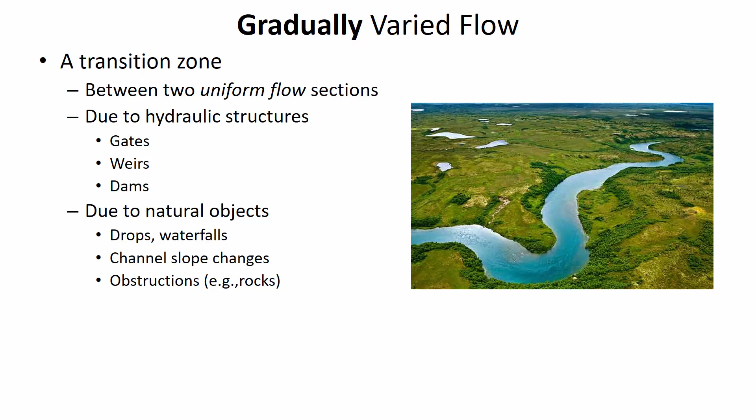There's lots of things that can cause these irregularities, but by gradually varying flow, we mean anything other than a hydraulic jump or water flowing over the edge of a waterfall. Those are the two instances where the depth of flow is varying rapidly. So rapidly varying flow, RVF, is the hydraulic jump, where it's increasing its depth really quickly, or if water is approaching a drop-off, then it decreases really rapidly.

When the depth changes, the velocity does as well, to maintain the continuity relationship. In the calculations we're going to do, we'll assume the hydrostatic pressure distribution as we go down through the depth of the water. Since the water is open to the atmosphere and is moving relatively slowly in open channels, that's an okay assumption for us to make. It's not so bad. And we are going to be accounting for energy loss, whereas the Bernoulli momentum equation doesn't account for energy loss.

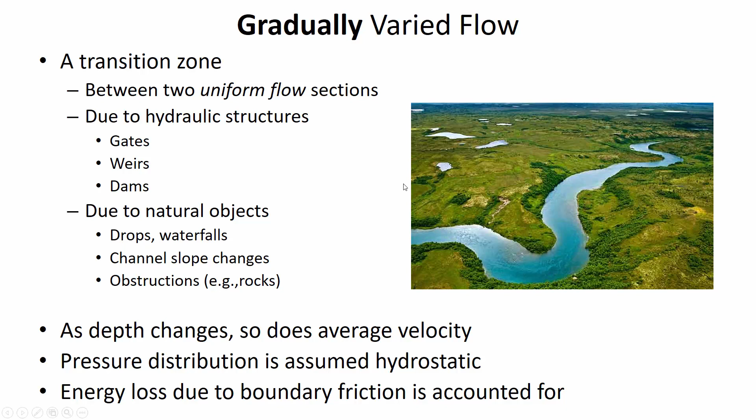Remember, one of the assumptions in the Bernoulli momentum equation was that there's a uniform velocity distribution upstream and downstream. The gradually varying flow approaches we're going to work through do account for the energy loss. So let's look at some pictures.

Here is gradually varying flow as water approaches a choke of an underflow gate. The reason the depth is increasing is so that enough energy can accumulate upstream of the gate to force the water under the gate at a high velocity. It's looking for in to equal out. Initially, when that gate is dropped, there isn't enough energy to push the water under the gate at a high velocity, so it begins to pool until finally there is enough energy upstream of the gate so that in equals out and it comes into equilibrium.

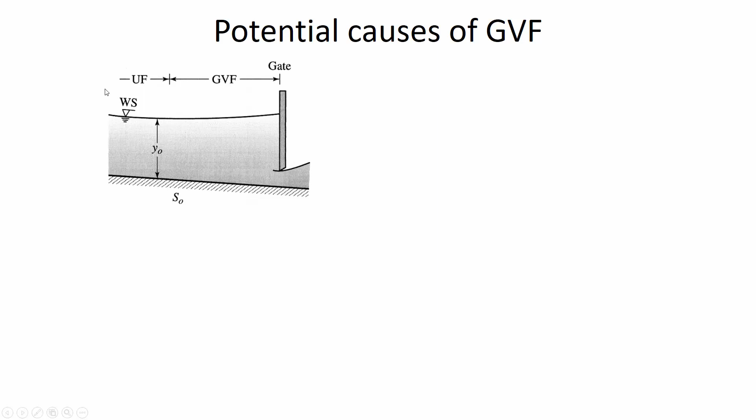This section, GVF, is the gradually varying flow. Any guesses on what UF stands for? Lots of good guesses, you're right: uniform flow.

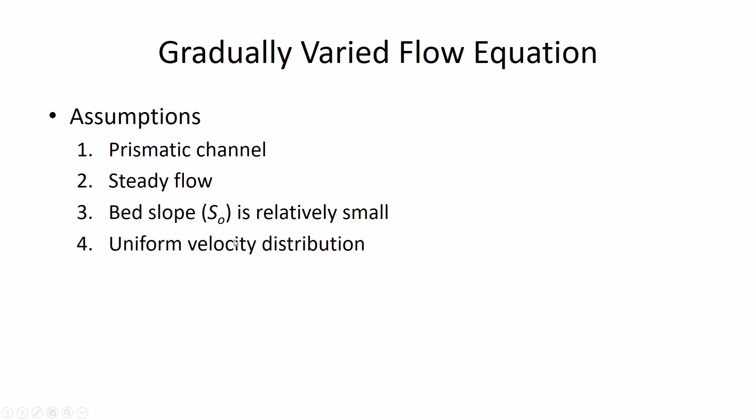Uniform velocity distribution is maybe the biggest weakness in what we're assuming—that the velocity at the bottom of the channel is the same as the velocity at the top. That's primarily where we get errors between predictions and what we observe in the field. This error is maximized for shallow slopes, but when you have a relatively steep slope, the error becomes smaller.

A kinetic energy correction factor equal to 1 would mean we're assuming relatively laminar conditions—no, I'm sorry, the other way around. We assume the flow is turbulent, not laminar. The laminar condition is when, for example in a pipe, we have the bullet-shaped velocity distribution, which requires a kinetic energy correction factor equal to 2. So a factor of 1 means our Reynolds number is beyond about 4,000, and that's usually the case even in a slow-moving stream.

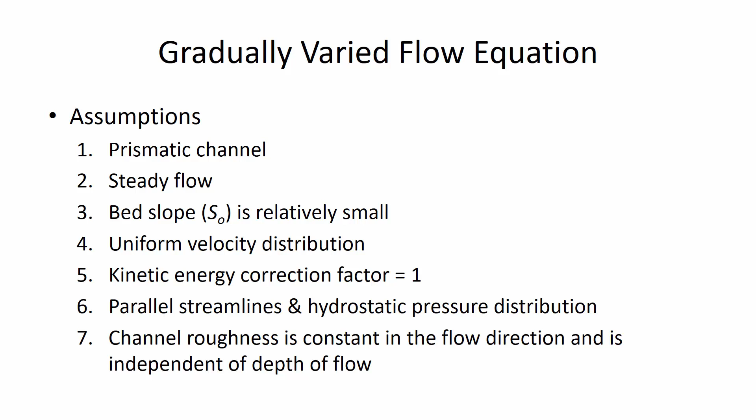We also assume parallel streamlines and hydrostatic pressure distribution, and that the channel roughness is constant for whatever section we're applying this equation over—that is, you're not going to have a section of concrete with relatively smooth roughness and then gravel. You can only apply this over sections where the roughness coefficient is the same, so you'd have to break it up into pieces if the roughness varied through different sections.

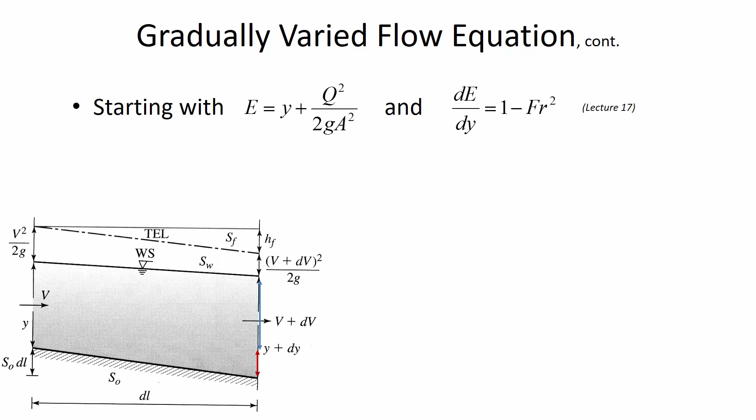Okay, now to give you a bit of background, remember our definition of specific energy. It's that at any location it's going to be the depth and the velocity head. And so starting with the idea of specific energy, back from lecture 17, we had the idea introduced that the change in energy with respect to depth is 1 minus the Froude number squared.

Now what we're going to do with that is try and predict the slope of the water surface. And what we can do is say, well, the total energy, here in the text it's saying the dH dl, where h is the total head, including the depth, the velocity head, and some distance above vertical datum, so z.

So if you have the slope of the energy grade line being the change in energy with respect to position, that's S sub f, we're just saying the slope of our energy grade line is how much energy is changing with respect to the distance downstream. And then the slope of the channel, S naught, is dz dl. So it's how much elevation is being lost over this length, just channel elevation.

So here's what we can do. We can put this into this relationship and predict dy dl. So that's the change in depth with respect to length.

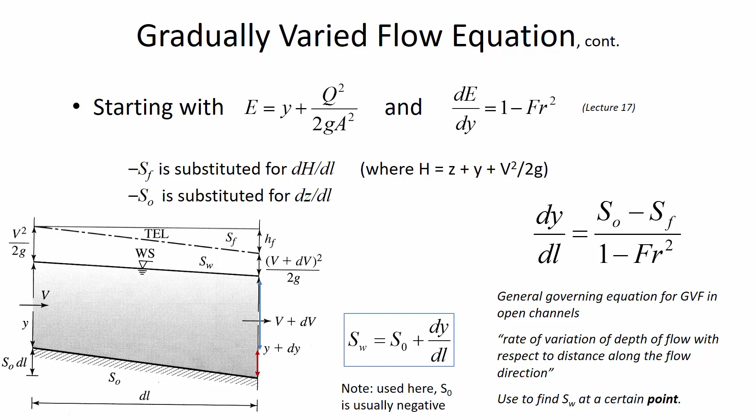But here we have to be a little bit more careful about slopes. The channel slope is going to be downhill, and so you do need to put a negative sign in here if you want to find the water surface slope. Because dy/dl could be positive or negative, since sometimes the water is getting deeper in the direction of flow, and sometimes the water is getting shallower in the direction of flow.

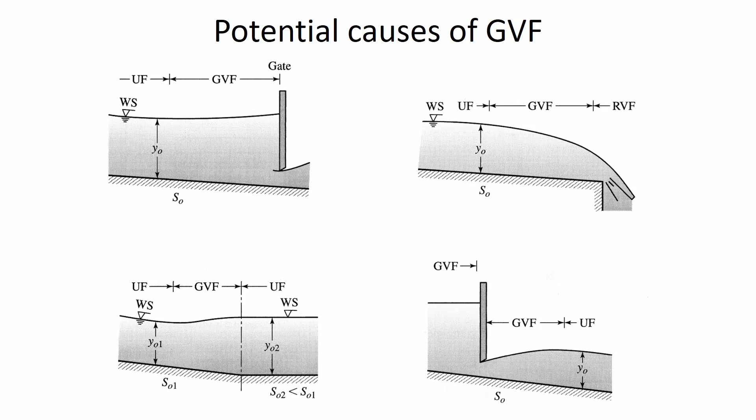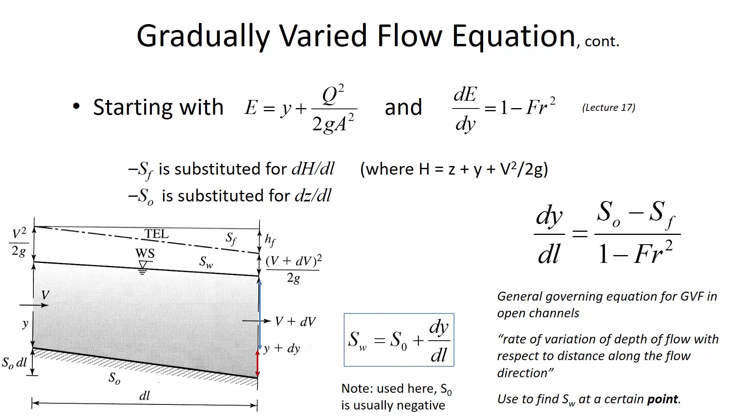Remember these. We may be using the process equation to look at a situation where the depth is increasing, and other cases where the depth is decreasing. So in the homework assignment, you have a question where you need to be sure that when they tell you the slope of the channel, you make that a negative number. The example we're going to work today will reinforce that necessity.

So where do you get the slope of the energy grade line? We can solve that using Manning's equation. For a certain channel, we may know at a location, we can go and measure what is the depth using a yardstick or whatever. We can know the depth in the stream, we can know the roughness, the channel geometry, and so the only unknown in Manning's equation will be the slope of the energy grade line.

You physically measure the slope of the water surface, the slope of the channel. And then based on knowing the depth, you can find the Froude number.

So if you make that substitution, putting Manning's equation into S sub F, here's what it looks like for SI units and for British gravitational units. The reason why that's different is, of course, Manning's equation in SI is Q equals A to the 5/3, S to the 1/2, and P to the 2/3. That's SI units, but in traditional units, we have to add 1.486 as the units conversion.

That is really terrible, 1.486. And so this is rearranging that to solve for the slope of the energy grade line, what you'd get for SI units or for BG units. Now, this is true regardless of whether the channel is rectangular or trapezoidal, whatever shape you've got.

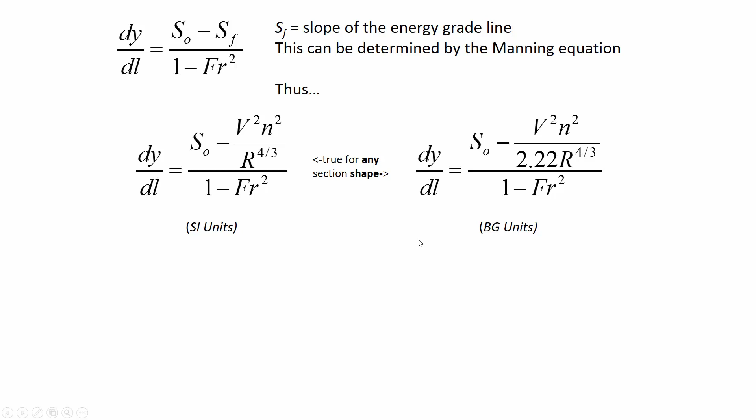If you have a wide channel, then things become a little bit easier. What you can do if the channel is wide is you can use the normal depth and the critical depth rather than having to directly calculate the slope of the energy grade line and the Froude number. A wide section is one where the width is more than 20 times greater than the depth.

And what that essentially means, the implication of a wide channel, is that it's so wide that the edge effects can be neglected. Even if it's rectangular or trapezoidal, a wide channel is so wide that the majority of the resistance will be along the bottom of the channel, and whatever resistance you get on the side of the channel can be neglected. That's kind of what we're doing with the wide assumption.

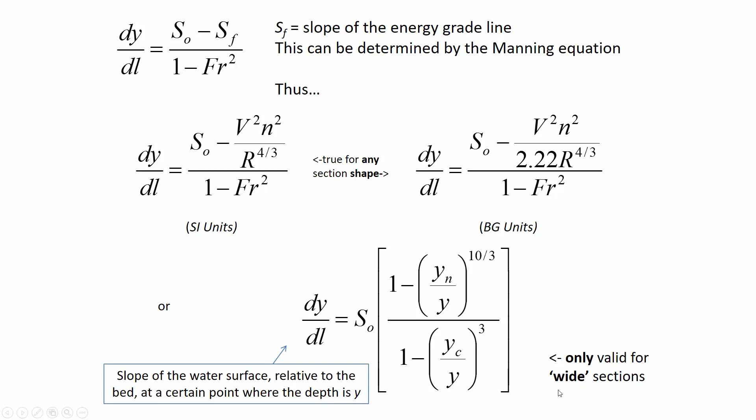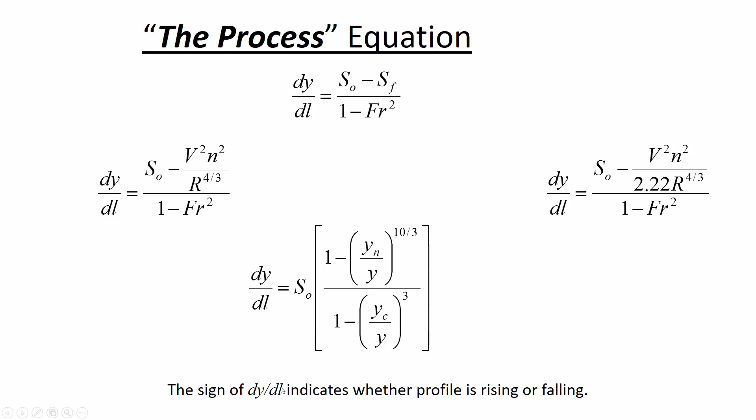So this is the process equation, this dy/dl. Sometimes in the book it'll talk about the process equation, and this is the one it means. The sign of it indicates whether the water's getting deeper or getting shallower, and that's really important for being able to classify the water surface profile into the correct category. We'll look at some additional pictures of different physical features that cause gradually varying flow, and we'll show how dy/dl can be used as a tool for diagnosing what kind of water surface profile you've got.

One other implication of the wide channel assumption is that the normal depth has a simplified way to solve for it. Normally when we are using Manning's equation and solving for the normal depth, we would, for whatever the shape is, use Q equals A to the 5/3, slope to the 1/2, and P to the 2/3. So for whatever the channel is, we would put Y into both the A and the wetted perimeter and try and solve for Y.

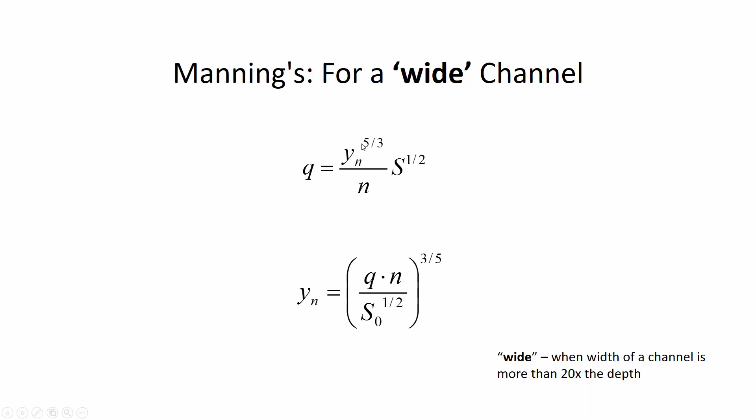But if it's a wide channel, then you can just take the flow per unit width, Q, multiply it by the friction factor, N, and divide by the channel slope to the 1/2 power, and then all of that to the 3/5 power. So these are some simplifications if the channel is wide.

All right, so here is an example that we're going to work through.

We have a rectangular channel carrying 20 cubic meters per second, and it's 40 meters wide and 2 meters deep. That does meet the threshold of being a wide channel, so we can use these shortcuts.

Here the bed slope is given, it's 0.00015, and that's downhill. We have the Manning's roughness, N. We want to find the rate of flow depth variation, that is dy/dl. Then from that, identify whether the depth is increasing or decreasing. And finally, find the water surface slope with respect to horizontal, meaning combine the channel slope and dy/dl and solve for SW.

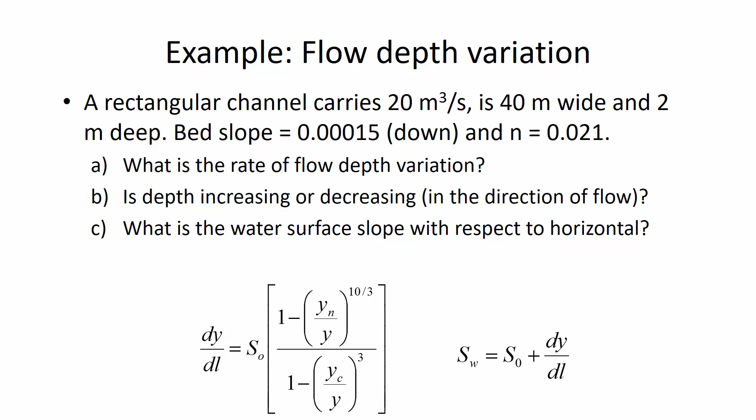So I'm going to pause the recording and circulate around as you're working on this. If you want to check some of your intermediate calculations, I'll be happy to show that to you.

So we're calculating the critical depth and the normal depth. You'll do that a lot over the next couple of weeks because we're always interested in how the depth at a certain location compares to the critical and the normal depth. In the past you already knew what it means when the normal depth is greater than the critical depth, or if the critical depth is more than the normal. Remember that tells us if the conditions are supercritical or subcritical. We'll get into that in just a minute.

So if you substitute in the given depths, the normal depth relative to the depth at our certain location, which is 2 - this is just at a certain spot where we're trying to find dy/dl - and then the critical depth relative to that depth at that certain spot, that tells us the dy/dl is 1.39 times 10 to the minus 4th.

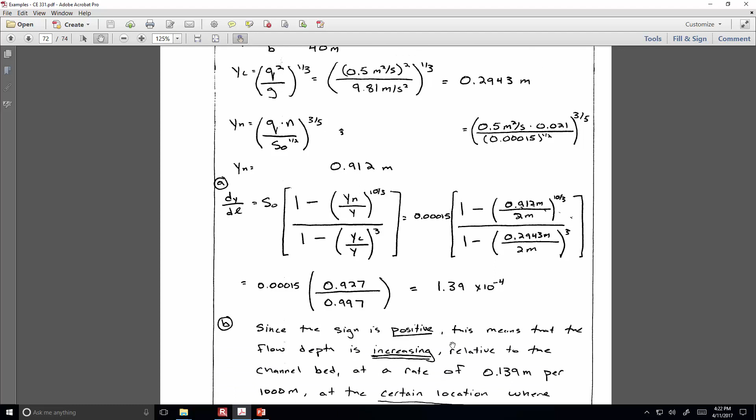Now the interpretation of that is that the flow depth is increasing in the direction of flow. Every 1,000 meters, the water depth would be increasing at 0.139 meters. That's relative to the channel bed so far. It's not until part C that we're finding out relative to horizontal how things are getting different. So the dy/dl is just saying, relative to the bottom of the channel, is the depth increasing or decreasing?

Now, here on the board and also on the screen, I've drawn some dashed lines to indicate here is the critical depth, here's the normal depth, and our actual flow depth that we're encountering is above both of those. This is an M1 profile. That M means mild, and anytime you have the normal depth greater than the critical depth, that's a mild slope. It means the flow is going to be subcritical. Zone 1 is the region above the first of these lines, zone 2 is between them, and zone 3 is from the channel bottom up to the first of the lines.

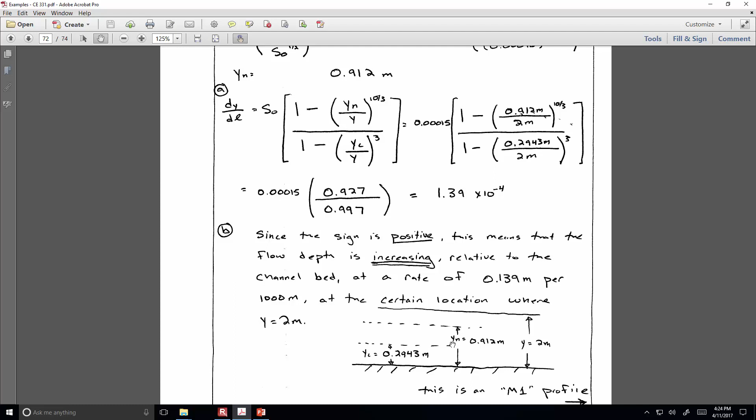Sometimes, like if it's a steep slope, then it would be the critical depth that is deeper than the normal depth. But here it's mild. Our conditions are M1 because the water surface itself is in zone 1 up here, and mild because the normal depth is greater than critical. There's a lot of reasoning that you need to include in your assignments and in the exam, the final exam. You'll need to explain, not just that it is M1, but show that you know the rationale for why it's an M1.

It would be M2, yes. If the depth was 0.8, then it would be M2.

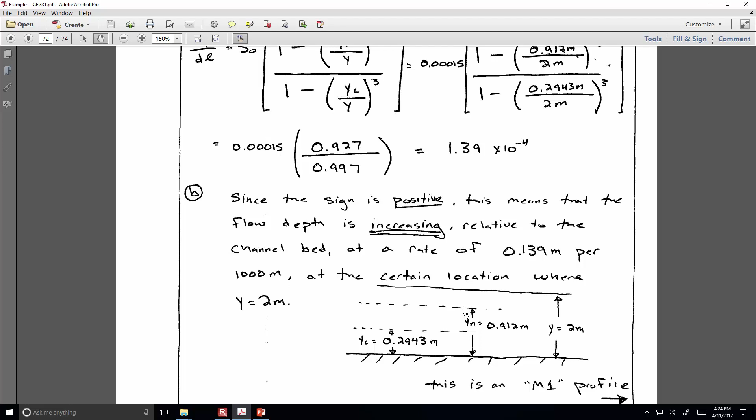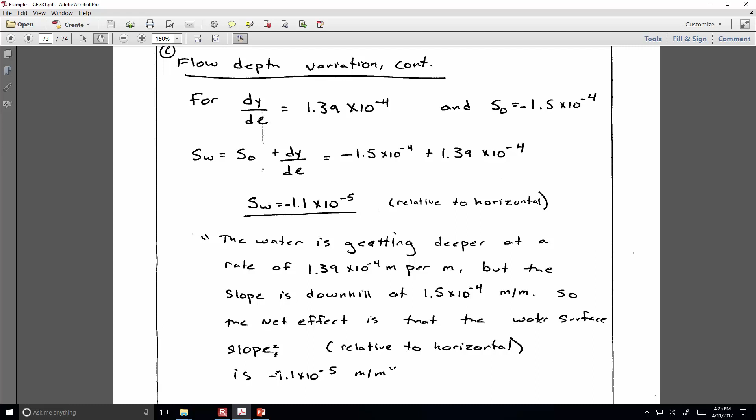All right, so now part C here. We've got some dy/dl that we calculated, and this is where we need to be sure that we account for the negative sign of the slope. So the water surface is, actually it's getting deeper, but the downhill slope is steeper than the rate that it's getting deeper. So the net effect is that it's actually losing - the water surface is losing elevation in the direction of flow relative to horizontal. My sketch doesn't really show that because we've just got the channel bottom, but what it means is if we were keeping track of it, it's getting deeper in the direction of flow, but it's getting deeper more slowly than we're losing elevation in the channel bottom.

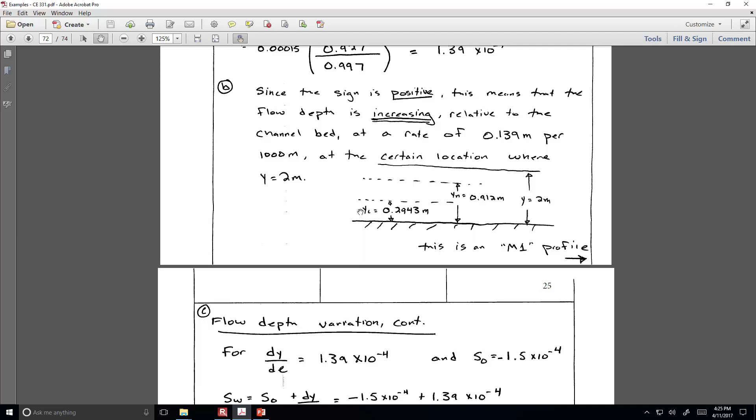So the absolute elevation of the water is decreasing. I guess that's why it's flowing from left to right.

You can actually have an adverse slope, sometimes the water flows uphill. Anybody ever been to a water park where you actually went uphill? I have. It was great, had a ball. Abu Dhabi, yeah. Water flows uphill when you've got enough money.

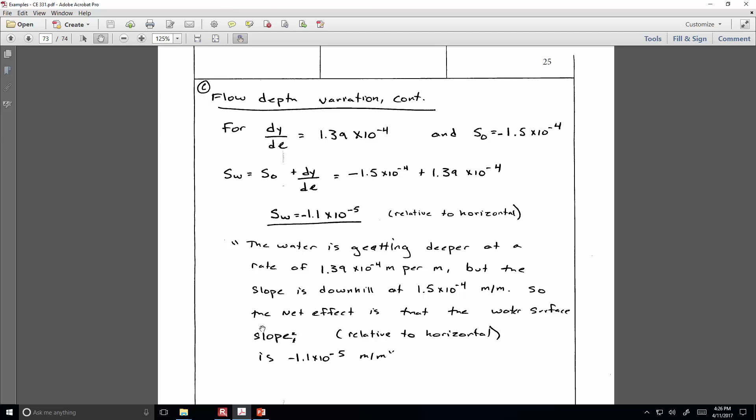All right. Any questions on this example?

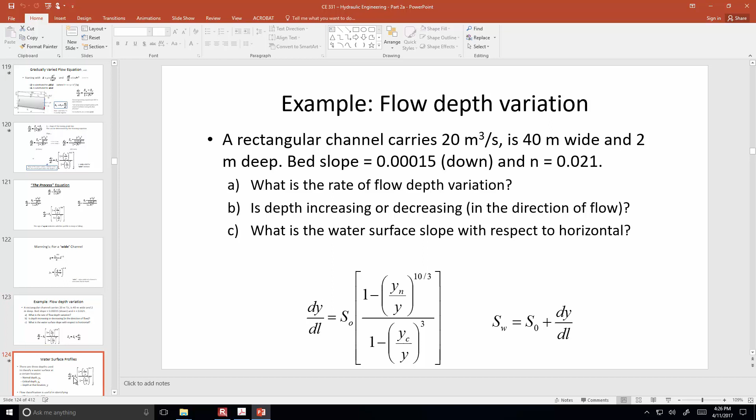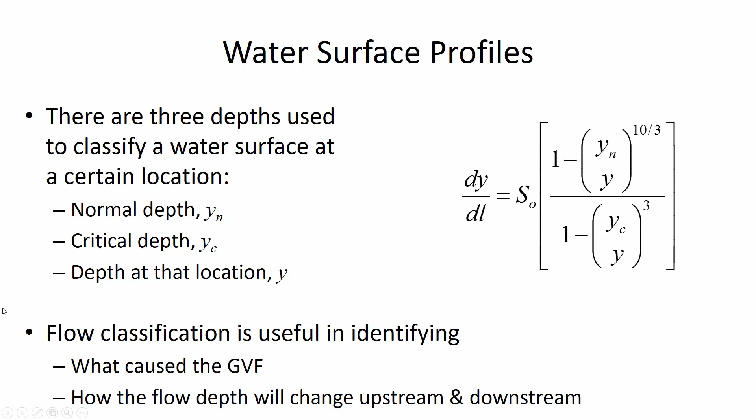Designating whether it's M1, M2, M3, those sorts of classifications can be helpful to try and figure out what's causing the observed behavior. So even if you don't know what's downstream, the simple fact that you have an M1 profile would tell you there's probably an obstruction downstream that's causing pooling where you're at. It also helps you predict as you continue in a certain direction whether it's going to be getting deeper or shallower.

A mild slope is any time the normal depth is greater than the critical depth. Steep is the reverse of that - when you have the normal depth less than the critical depth, that's indication of steep. Of course, critical is when they're equal.

Horizontal is when there's no slope. And then here's an adverse slope, where the water is forced to flow uphill briefly.

Now just the variable definitions sometimes can be confusing. Here they're using y naught to mean normal depth, and previously we've sometimes called that y sub n. But the critical depth, fortunately that doesn't change.

What you need to do to classify whether you have your first one as M, S, C, H, or A is just comparing the normal depth to the critical depth. So when I say explain the logic behind your water surface profile designation, the first thing is just comparing those.

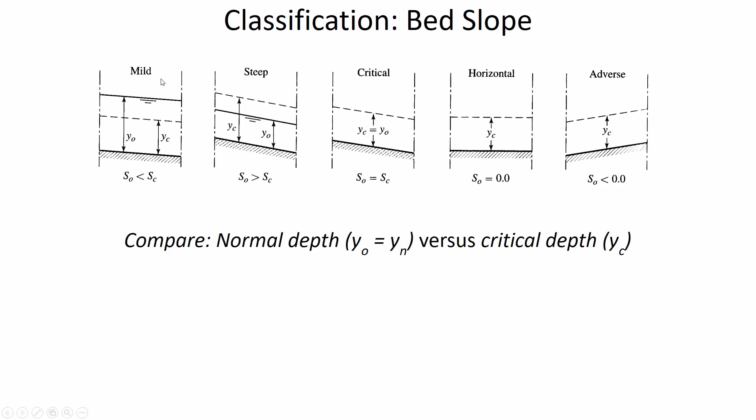Then the next step is the zone that you're in. Zone 1 is above the highest line - and by the way, sometimes the highest line will be the normal depth, and sometimes the highest line will be the critical depth. But regardless of which one's on top and which one's on bottom, it still divides this region up into 3 zones: Zone 1, Zone 2, and Zone 3.

Zone 1 is above the normal depth and critical depth. In this case, if it's a mild slope, then the normal depth would be on top. Zone 2 is between them, and then Zone 3 is below both of them.

If the dy/dl is positive, then that means the depth is increasing relative to the channel bottom. Dy/dl negative means the water depth is decreasing in the direction of flow. Dy/dl of 0 just means you have uniform flow - that is, the depth isn't changing in the direction of flow.

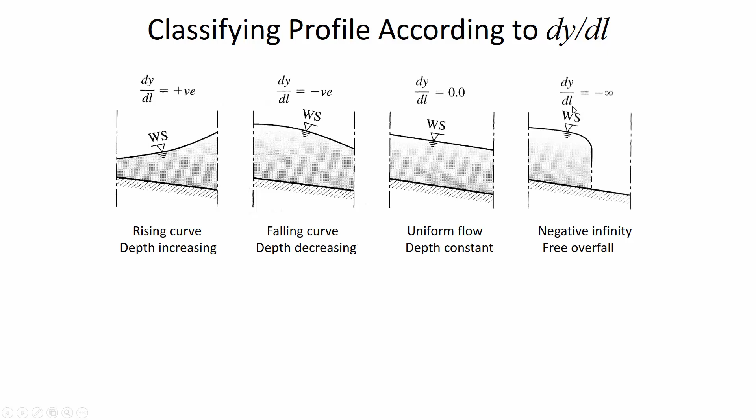And then if you had a free overfall, the water is just flowing over the side of a hill, but then you temporarily would have a dy/dl of negative infinity.

Anybody know of a physical feature that causes an M3 profile? Go ahead. Eddy? An eddy? Maybe. Think about an engineered structure, something that you could put into the channel or something you could build that would cause an M3 profile.

So M3 means normally it would be flowing subcritical because this is a mild slope, but now here the water is in the supercritical zone. If your depth is below the critical depth, that means right now the flow is supercritical, and it shouldn't be. So what causes that? An underflow gate, right.

All right, an M2 profile. Anybody think of a physical feature that would cause an M2 profile? So the water depth is decreasing in the direction of flow. A waterfall - yep. And what about an M1 profile?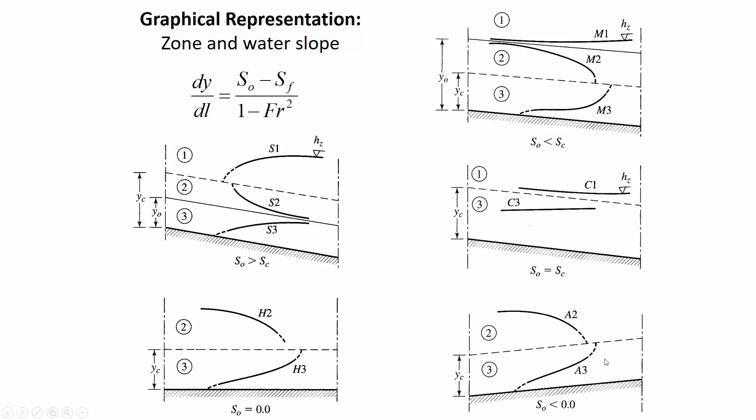These are in the book, pictures like this, and so if you have a problem where you're asked to draw—I think you do have a homework where you're asked to draw, like after a gate, what would the profiles look like—then it can kind of give you an idea of the typical shapes of the water surface.

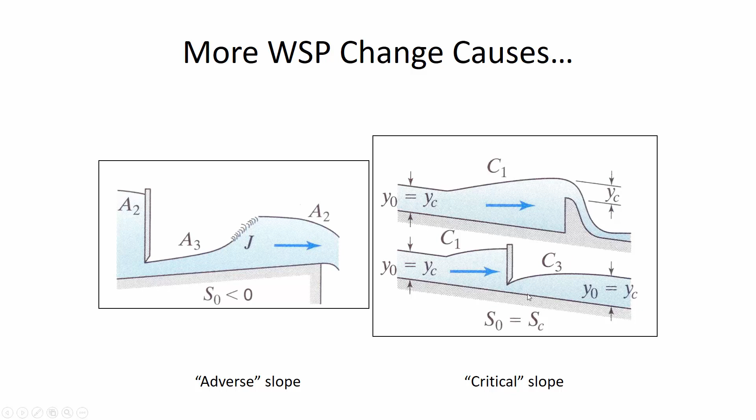Here are some hypothetical situations that could cause an A2 and an A3 slope. Or if the slope itself is critical, what could cause a C1 and a C3.

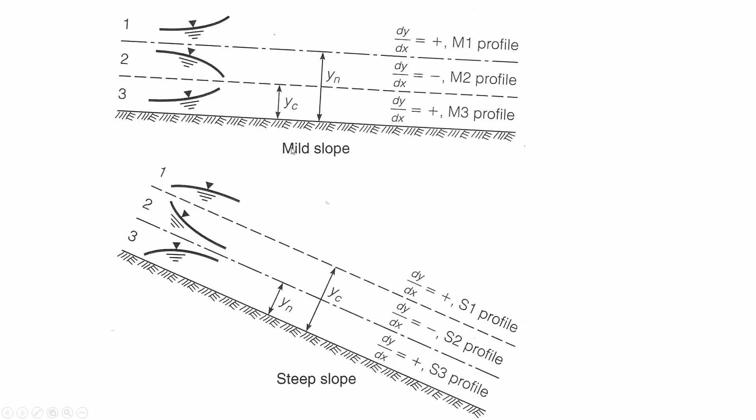And comparing the normal depth to the critical depth will tell you if it should be a mild slope or a steep slope. This is what we'll have most of the time, an M and an S. These other ones are far less common, very unlikely to have a horizontal slope or an adverse slope or critical. Here they are, but they don't happen very frequently.